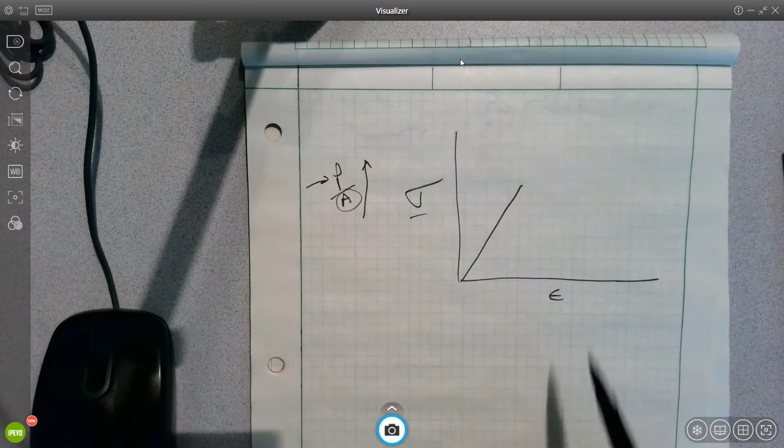And that, of course, raises the stress. Here, as the strain goes up, we know strain is delta over L. The original length does not change, it stays the same—what changes is the delta. So really this is a graph of the load and the change, that's really what the graph is of. We just call it stress strain because those 2 values are what we use to make the comparison when we're designing or analyzing. This first region, where it comes up and then hits the proportional limit...

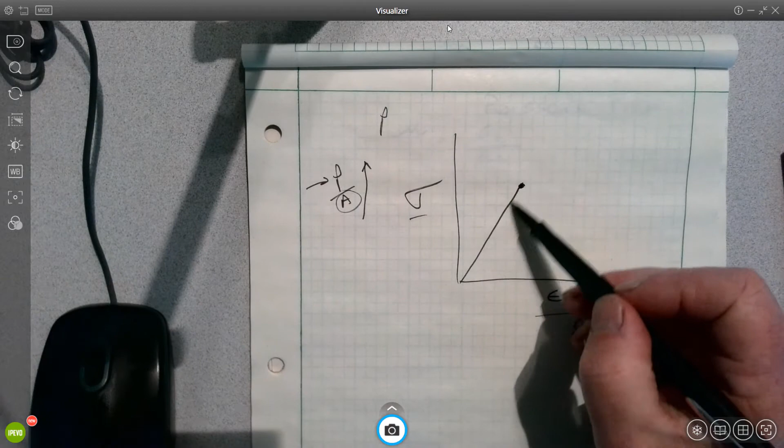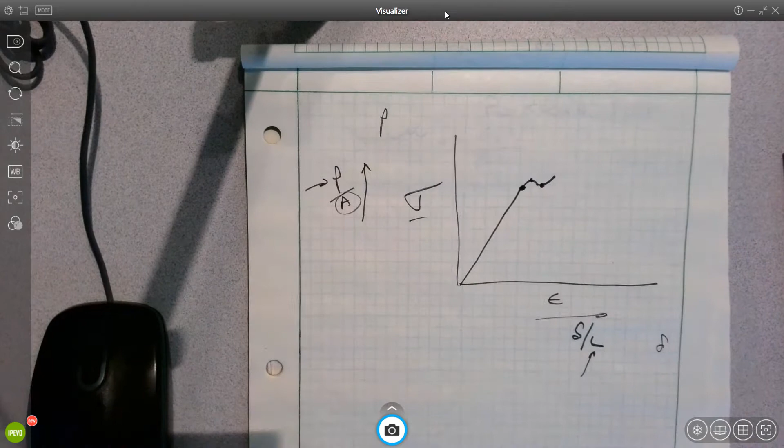Remember, the proportional limit is here at the end of the straight line. So first we hit the proportional limit, then it curls over and we hit the yield point. That's usually called the upper yield. And then we maybe have a lower yield, depending on the material. Not all materials have this beautiful curve like mild steel does. Then it comes over to the strain hardening area, and then it hits the ultimate strength, and then it fails.

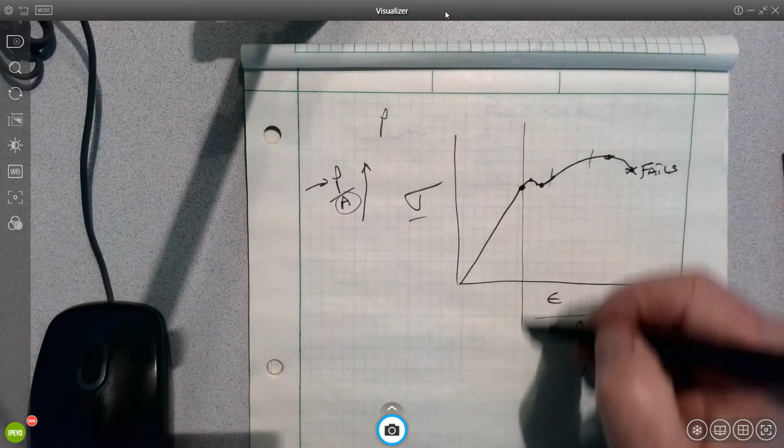Right? So that's our stress strain curve. What I want to emphasize is the Hooke's Law region, is from the proportional limit back, and this is called the elastic region. This is the region that we want to work in, and this is the only region of the graph that E is valid, that mu is valid, Poisson's ratio, which we'll do today, that thermal coefficient of expansion is valid, all only in this region of the curve.

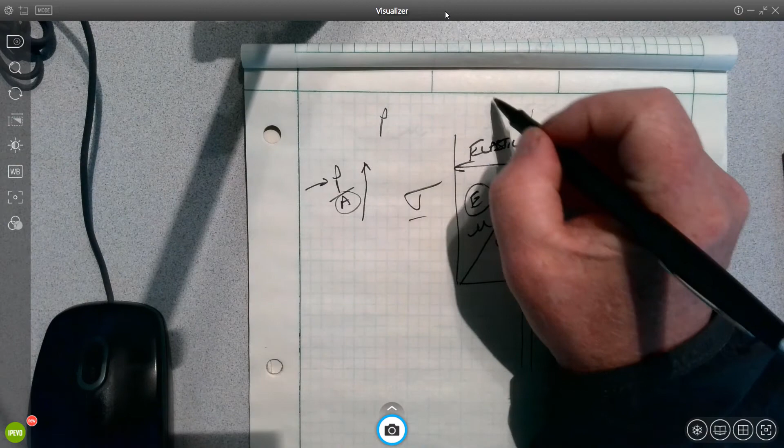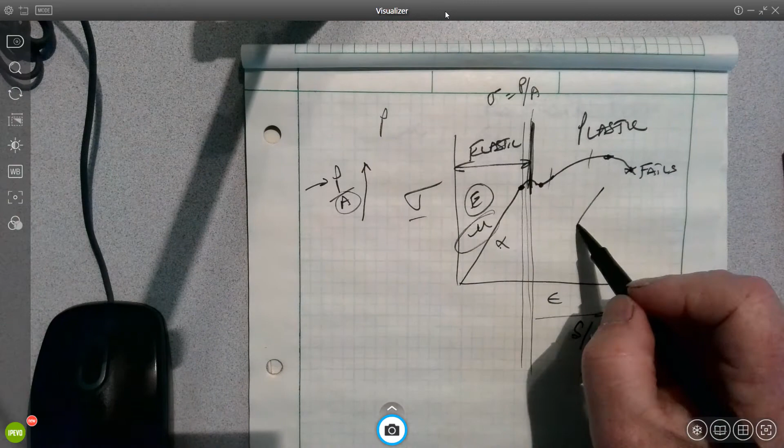If we are outside of this region, and we know this region, because we can calculate stress with P over A. We can calculate that stress, right? And we can see, and look and see, is it in the elastic or is it in the plastic region? That we should be doing first on every problem, because we cannot predict the elongation. We cannot predict the Poisson's ratio transverse change. We cannot predict anything about thermal expansion if we are in the plastic region. This is a no-go area.

All right, there we go. Stress strain curve emphasized.

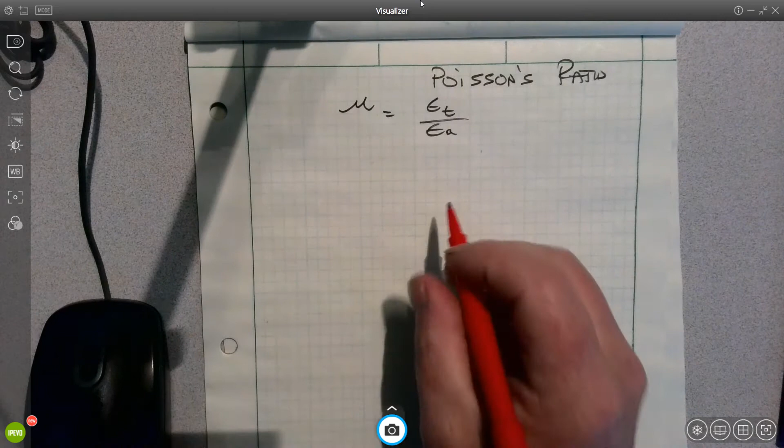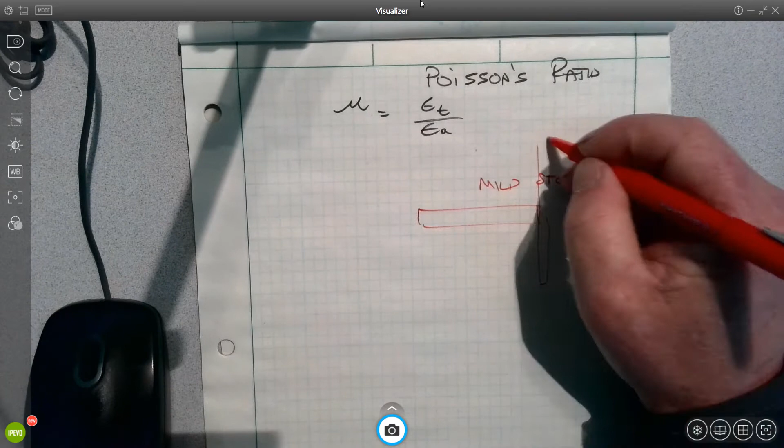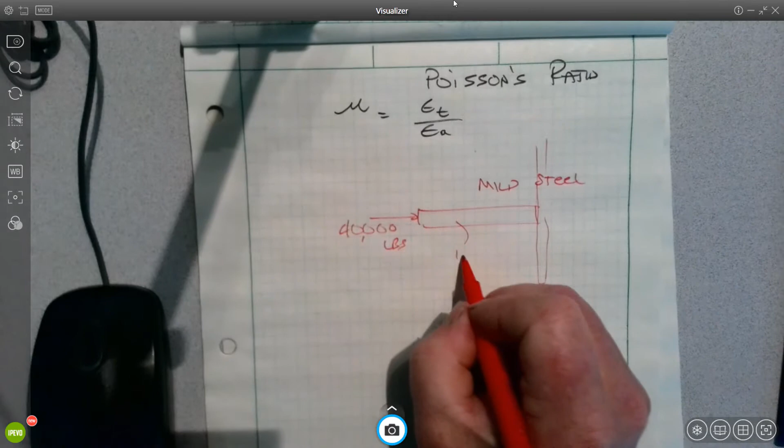If I have, let's say I have a piece of mild steel, and I have it welded to a plate, and I'm going to push on it with 40,000 pounds, a whole bunch of weight, right? And we'll say that this thing is 1 by 1, and it's a square shape, and it's solid, 1 inch by 1 inch, right? So we all know we can calculate the stress, and that's what we should do first, is calculate P over A, just to see if we're still within Hooke's law, right?

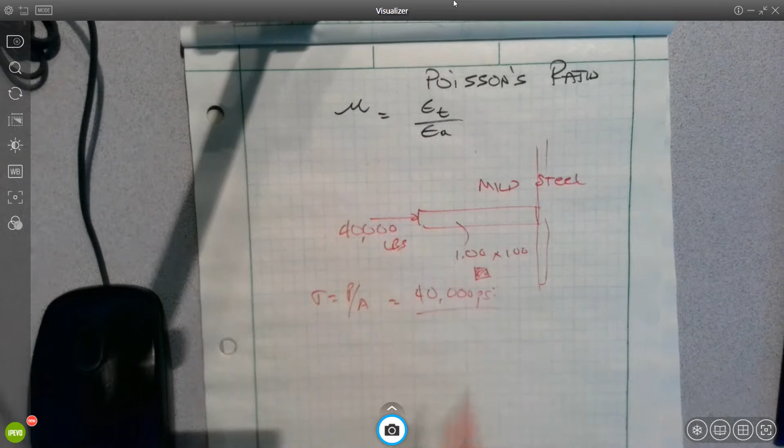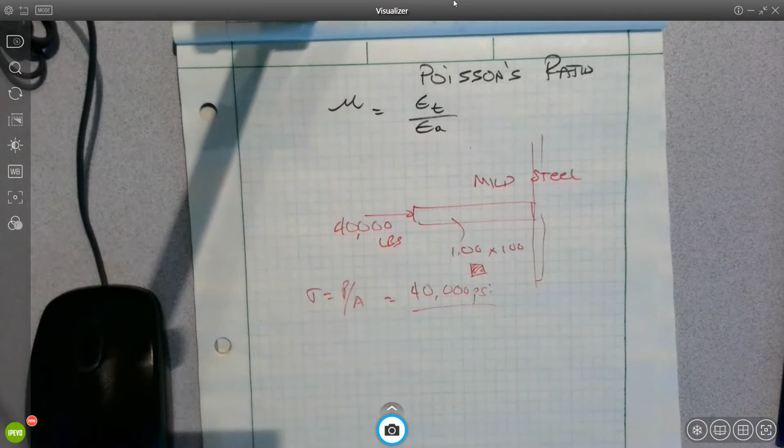So 40,000 pounds divided by 1 by 1 equals 40,000 PSI. Everyone follow me on that? That is 40,000 divided by the area, which is 1 inch squared. 40,000 PSI. I haven't talked a lot about the charts in the back, so I want to do that.

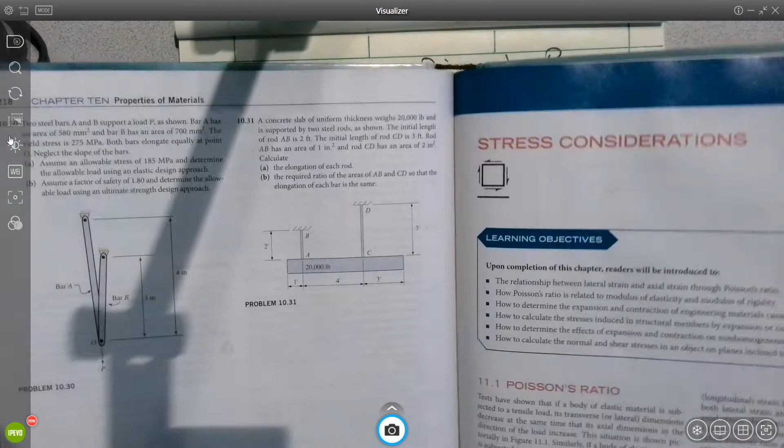This is what, let's say we want to know the elongation. That's our end goal, is like, how much did this deform, right? First thing we want to do is check and see that it's within the Hooke's law region. The region is defined by the yield stress. So let's go look at the yield stress.

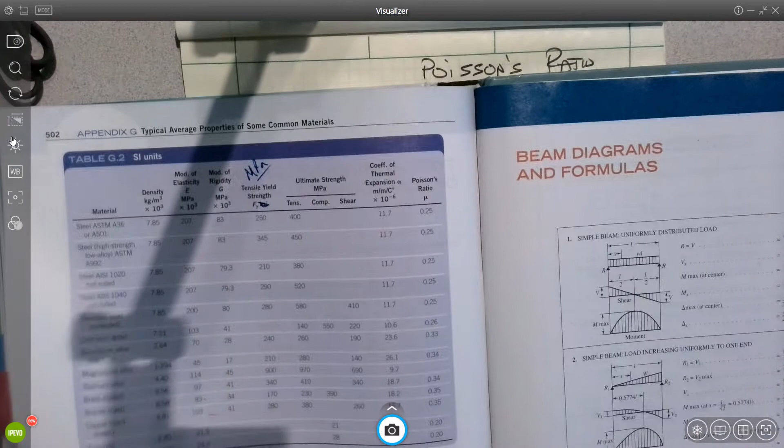In the back of the book are typical average properties of some common materials. Everyone see that? Looks like it's page 501. And in this, we can look up materials, and we can get material properties, E, G, which we have not talked about. Tensile yield strength, we have talked about that.

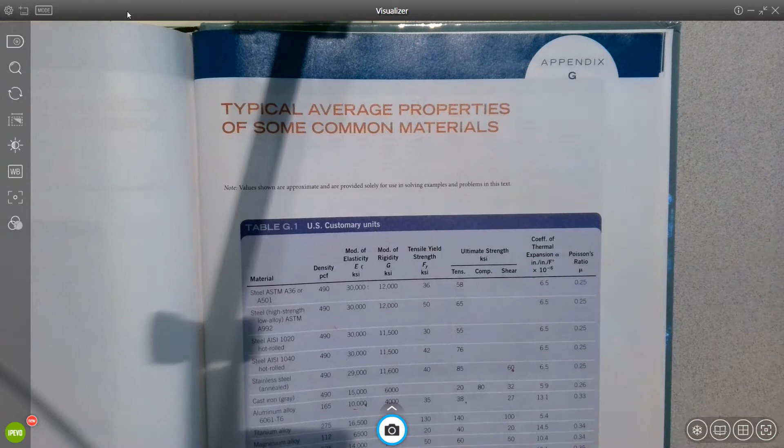That's the upper limit to Hooke's law. Ultimate strength, that's where the curve rolled over, way up past the permanent deformation in the plastic region. And then we have thermal expansion, and look at Poisson's ratio.

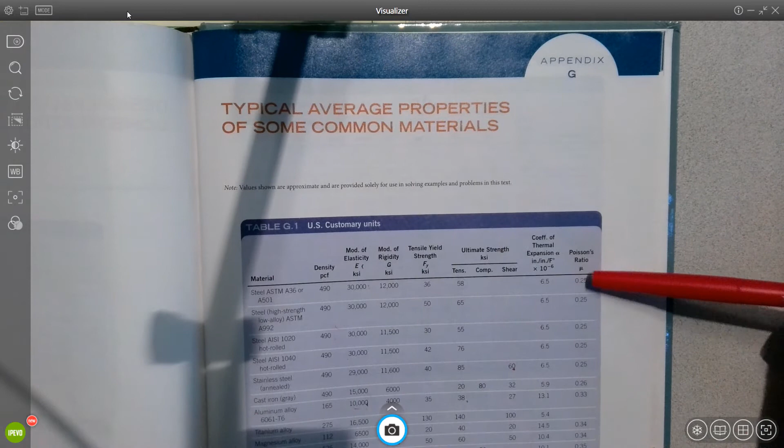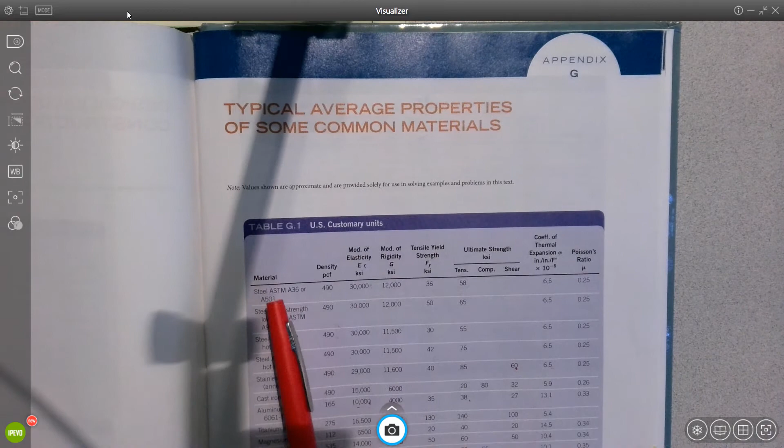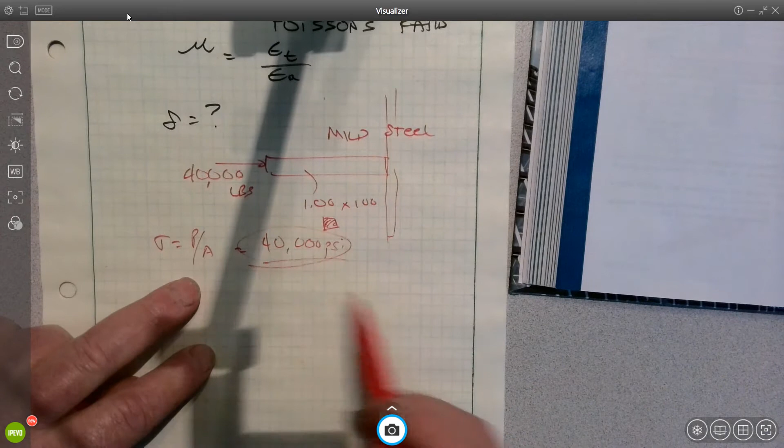Material property. I said we had mild steel, so that's this, A36. And the 36 stands for 36,000 tensile yield strength. 36,000 for A36. Well, let's see what we have. Right? We have 40. So the curve, which goes like this, right here is 36 KSI, 36,000 PSI. And that's where we can do all of our forecasting, under 36 for mild steel.

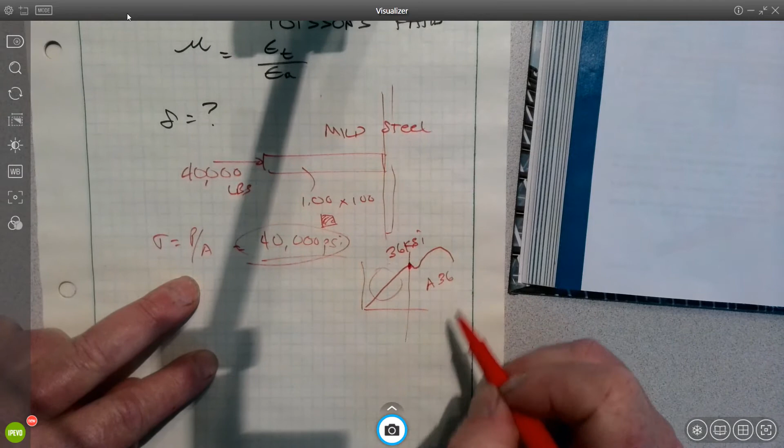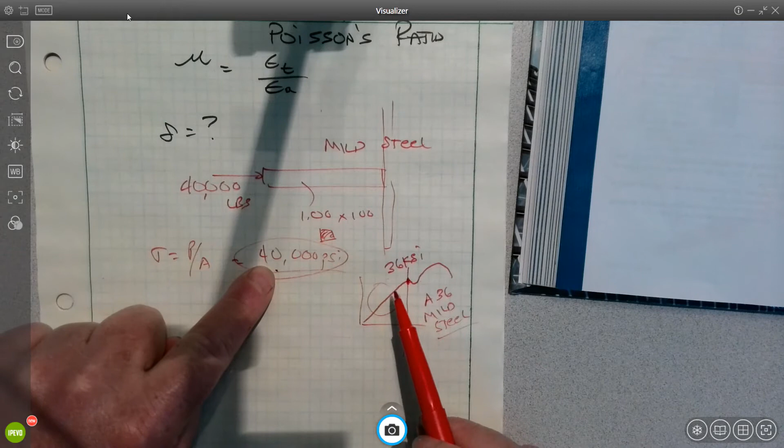This is A36 mild steel. Right? And we have 40. We are in the plastic region. We are outside of Hooke's law. We can do nothing else. That's how it works. That's how and why we check it.

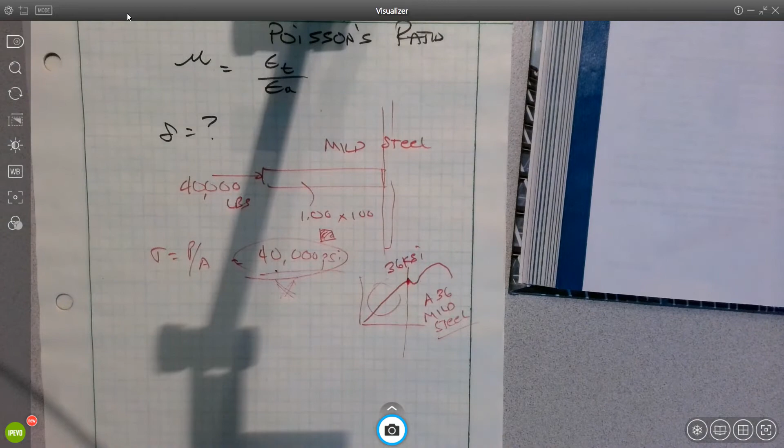Okay? All right. So I want to continue this problem. So I'm going to change the load so we can actually do it. Right? So I'm going to change this to 30,000.

Now I am at 30,000 PSI, and I am down within Hooke's law, meaning that the material is predictable, and I can make some predictions.

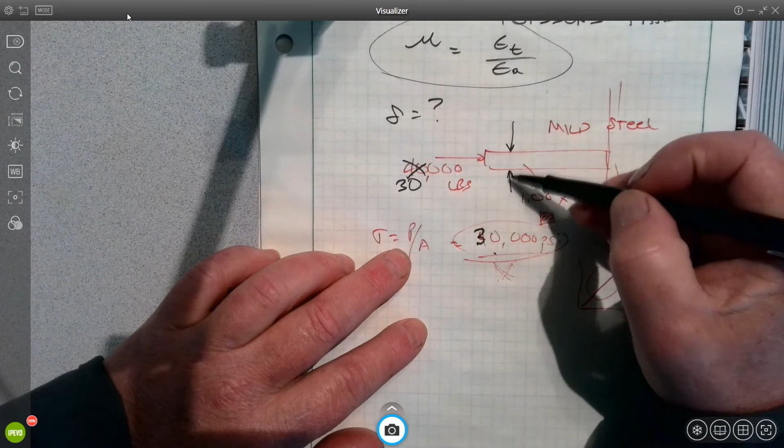So what Poisson's ratio does is it gives us the amount of transverse change. This is transverse, and this is along the long axis of the part. That's what we call elongation, or that's our delta that we calculated before.

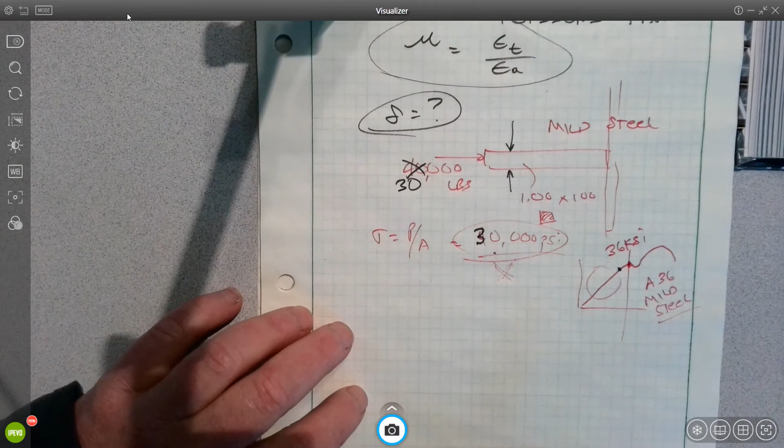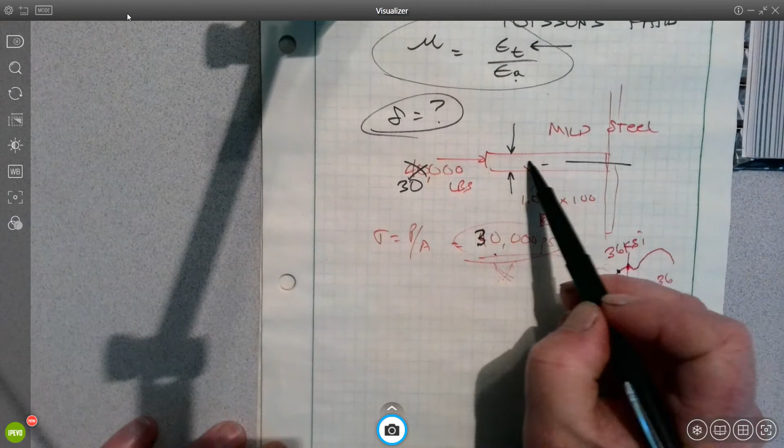So Poisson's ratio relates this transverse change to this axial change along the long axis, which is what we've calculated in the past. And strain, remember, is just permanent or non-permanent deformation, so it allows us to predict what is going on in the change.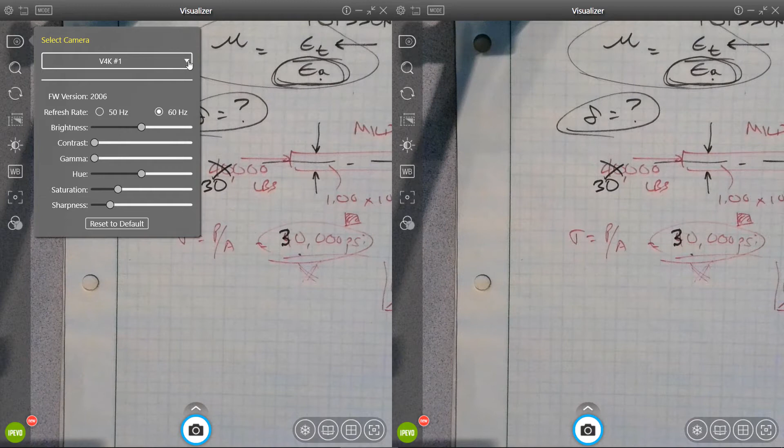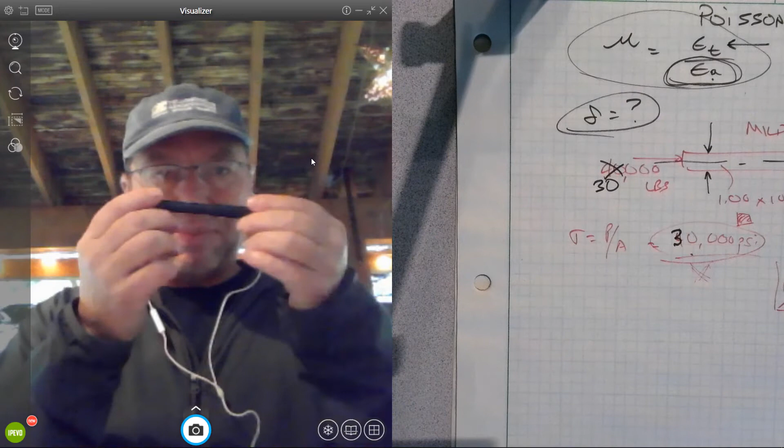Strain axial is what we've calculated - that's how much it stretches. So if I take my pen and I stretch it - oh, that was too much stretch - right there, that's stretch, axial.

When we pull something apart, when we stretch it, that stretch has to come from somewhere, and it is the cross-sectional change - that's transverse. Poisson's ratio gives us that. If we can calculate the axial, and we know the material, then we can determine how much that cross-section changes, and we can calculate a new stress, because if the area gets smaller, the stress goes up. So that's Poisson's ratio, that's why we use it.

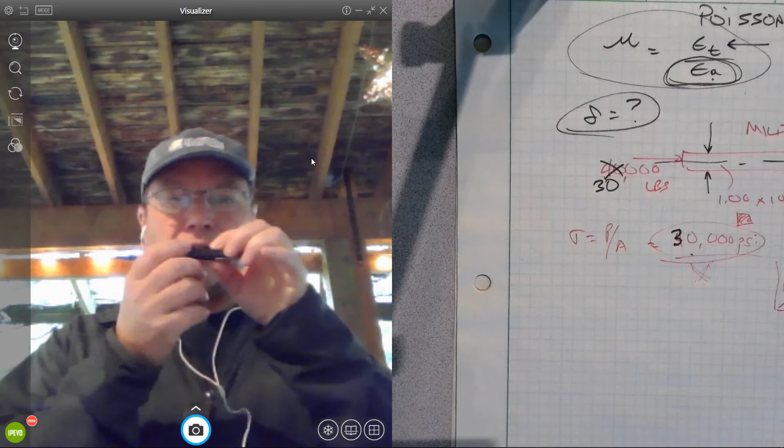It's a very small number typically. Poisson's ratio is very small. First of all, elongation typically is very small, so that means the cross-sectional area changes a little bit. But it's relational as long as we're within Hooke's law.

Let's continue here. Can I just minimize that? Oh, maybe - oh, no, can't do it. I'll get rid of me. I'll be back.

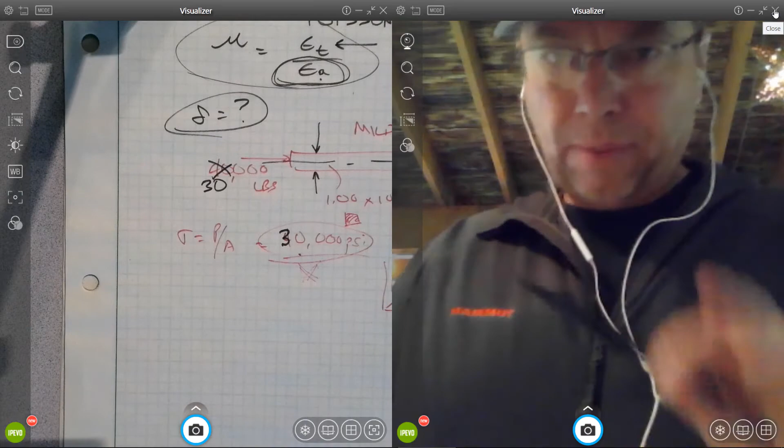So let's calculate this. The first thing, if we want to know how much it changes in the cross-section, the first thing we have to know is how much it changes in the axial, long axis. So how did we get that before?

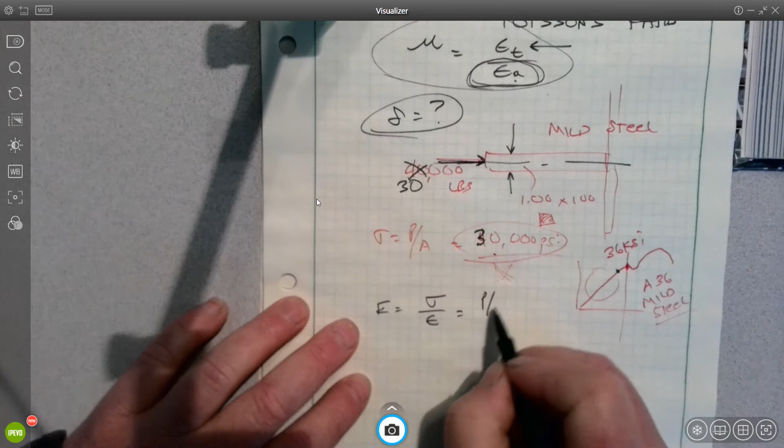Well, we know that E equals - what does E equal? Anyone remember? Stress over strain. And what does stress equal? P over A, delta over L.

This is our axial strain. If I can calculate this, then I can move forward and go for the transverse based on this relationship, because I know this. If I know the material, I know Poisson's ratio.

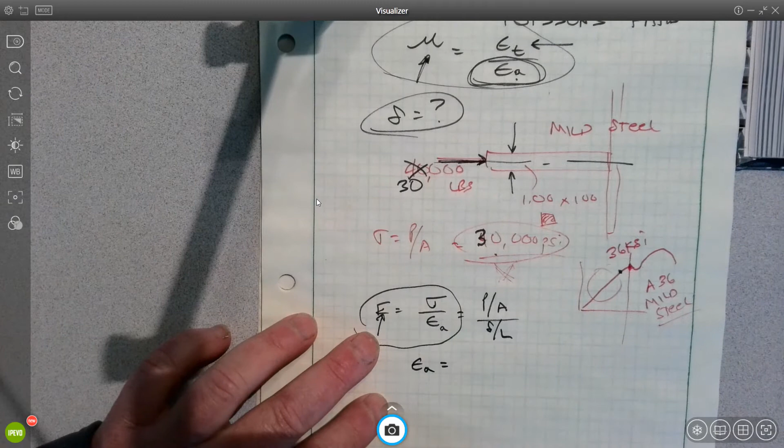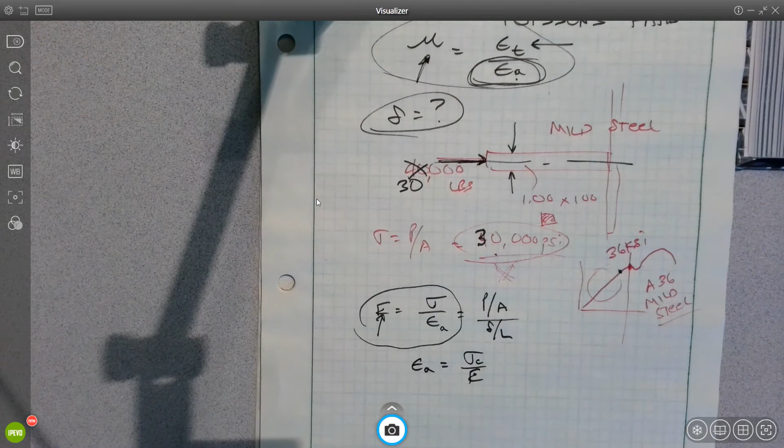So you can use this formula if you know the material and you know the stress. I do. So I can say my axial strain is going to be stress over - and this is compressive stress, right, because I'm pushing on it - over E. So I need E for mild steel. And where do you think I get that? I get it from the back of the book.

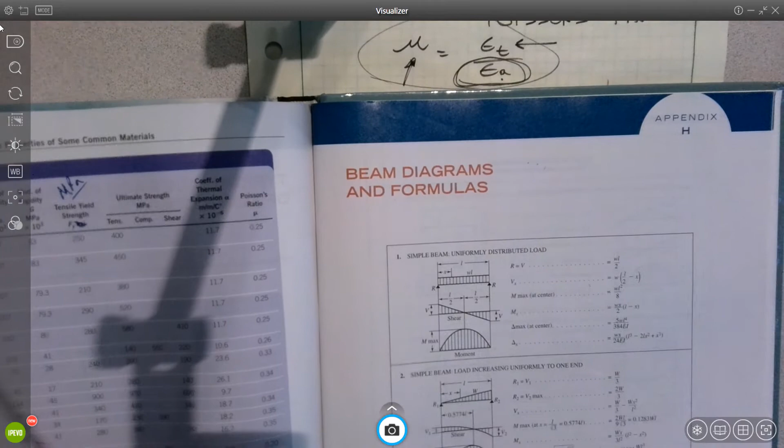You might want to tab this - I got it tabbed here. You know a lot of things about your formulas. And in this case, I know E is, for mild steel, 30,000, and Poisson's ratio is 0.25. So those are both pieces of information I'm going to need.

30,000, 0.25. Notice that it's 30,000 KSI - holy cow, this is huge. This is 30 million PSI, different than yield, which is 36 KSI. You might need to pause this now and then and process this, because I'm throwing a lot of numbers at you that I know really well and that you do not know really well.

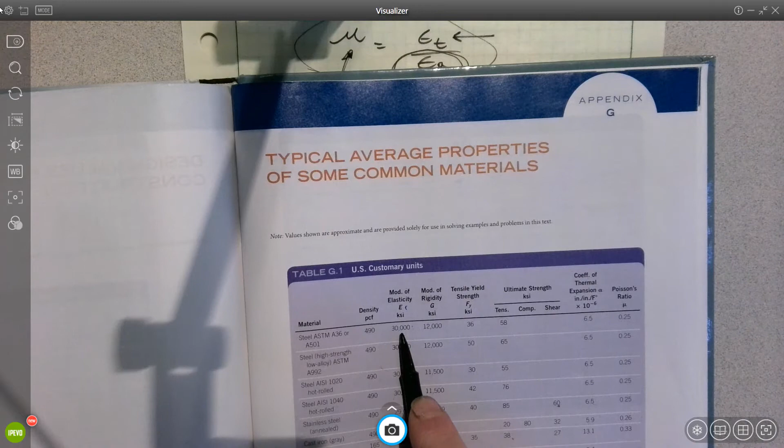So modulus of elasticity is a very big number - Young's modulus, 30 million PSI. Poisson's ratio, 0.25. So let's capture that. I know I have an E of, I'm just going to write it 30 E to the 6 PSI. Remember, it's 30,000 KSI. And then Poisson's ratio is just 0.25, and that's unitless - no unit on Poisson's ratio.

So how do we do this? Here's the E, we plug it in here, and we can say the axial strain is equal to our stress, 30,000. You do want to make sure you're in the same unit, PSI, over E, 30 million PSI. And there's a lot of zeros there, so I'm actually going to calculate it.

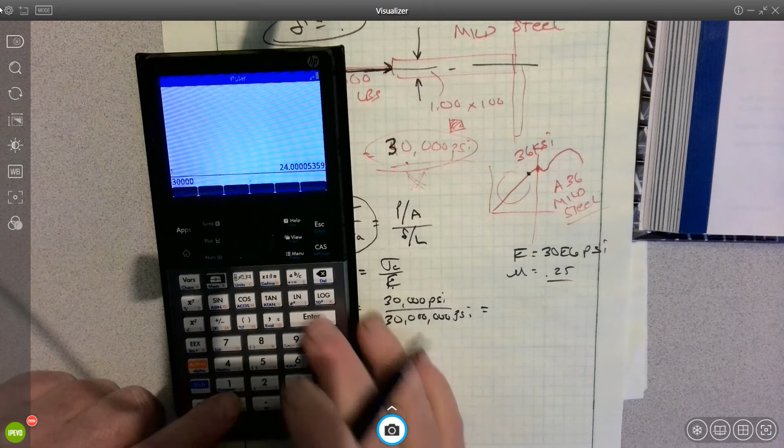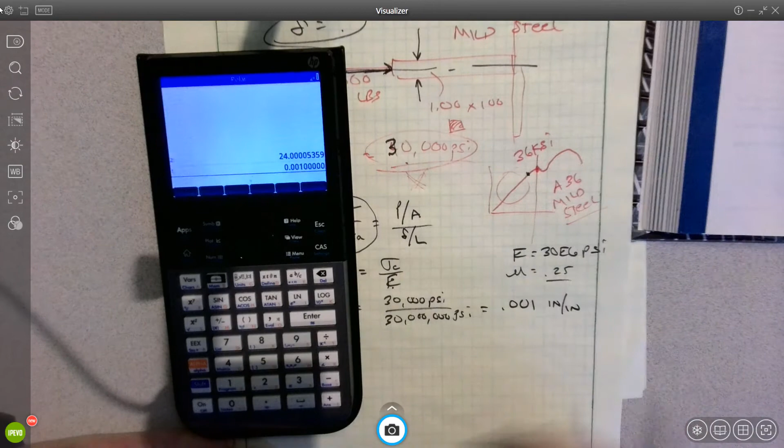I have a feeling it's like 0.001, but yep, 0.001. Remember, the unit of strain is inches per inch - it's how much change we get per inch, inches per inch, that's along the axis. And since we're compressing, this is actually a decrease.

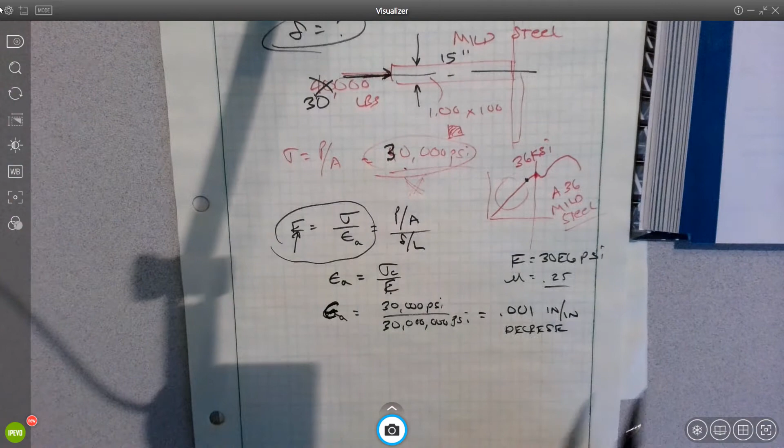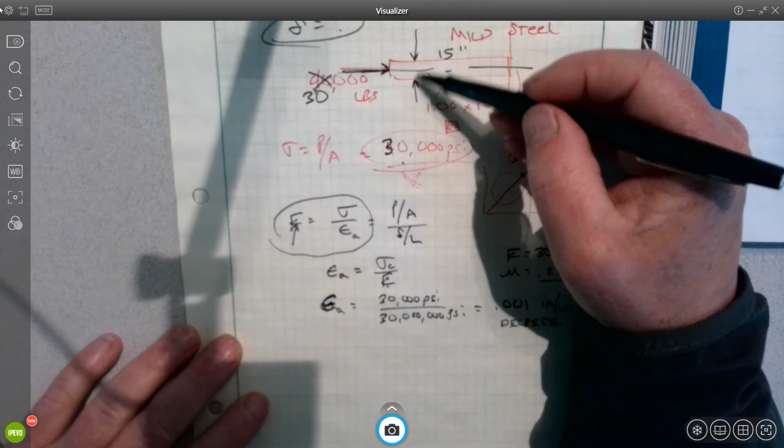Decrease in length per unit inch, 0.001. If I wanted to know the full change, I'd have to have some kind of distance, like 15 inches, and then I could calculate the total change. That's how we did axial strain. Now Poisson's ratio is going to give us how much this increases or decreases cross-sectionally. In this case, when you push on something, it gets bigger, so it increases. The only way you know that is by observation, there's no sign that tells it plus or minus. You just got to know it by looking at the system. So we know that if we push on this, this thing's going to get fatter.

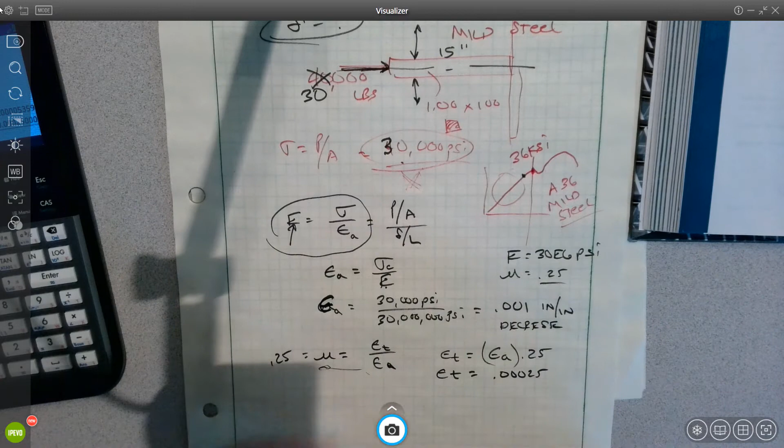Poisson's ratio is the relationship between the transverse and the axial strain. I know Poisson's ratio is equal to 0.25. So if I can calculate axial strain, which I just did, 0.001, I can get transverse. It's a multiplication: the transverse strain is equal to the axial strain times Poisson's ratio, 0.25. Transverse strain equals... so it gets smaller. It's 0.001 times 0.25, equals 0.00025. It's always very small. That's how much the change is. Now that doesn't give us a dimensional change, right? That just gives us the transverse.

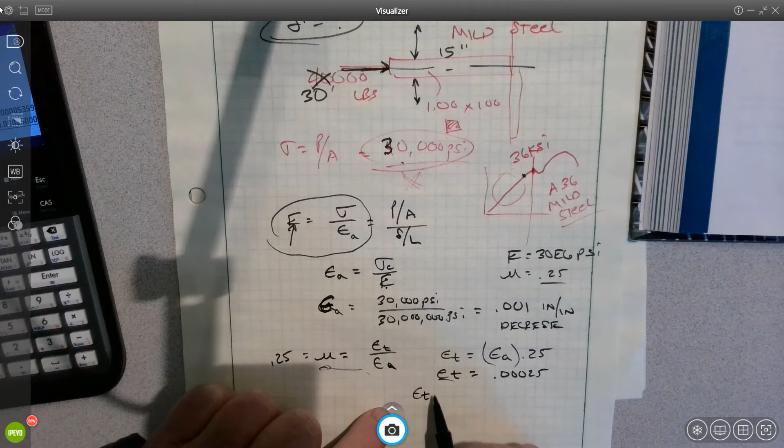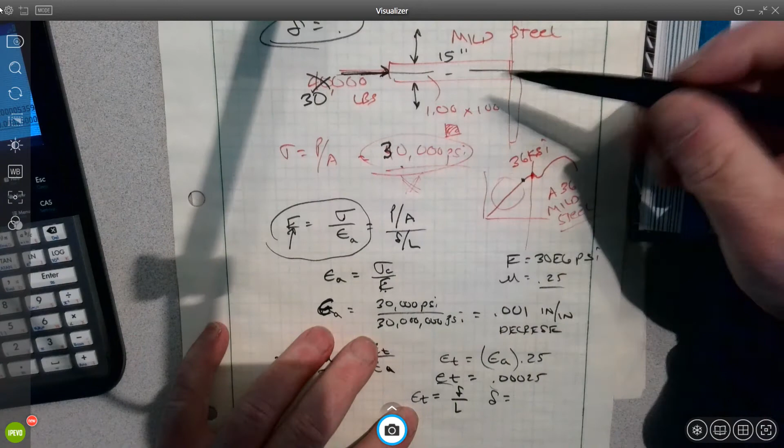But we know the transverse is equal to what? What was it equal to? Delta over the original length. And if I want to know the actual dimensional change, I put in the original length, I calculate a transverse, and I can get the actual delta change, which is going to be L. I said this was 1 inch by 1 inch, so original length is 1 inch, and my transverse that I just calculated with Poisson's ratio is 0.00025. So the actual change is 0.00025 inches increase, because I'm squishing it. And it goes, right? Increase.

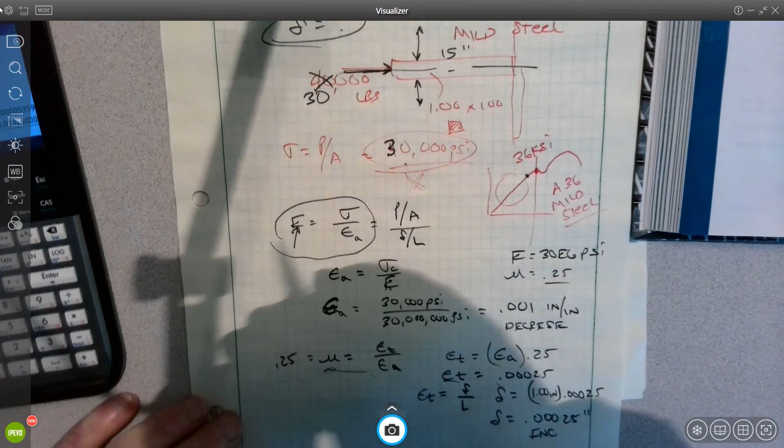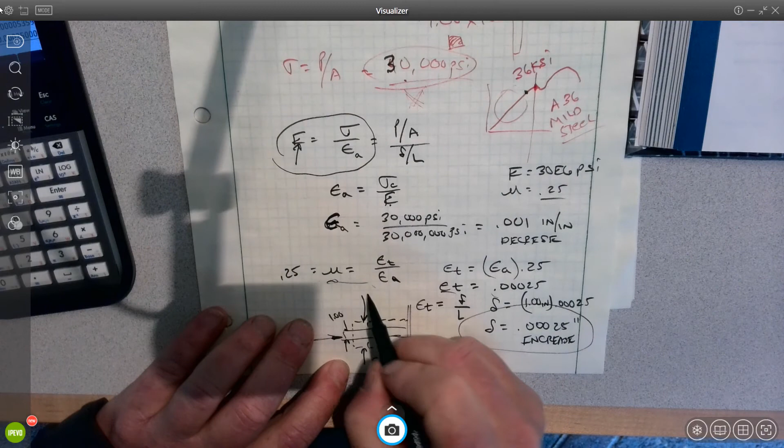And that's the delta, like, it was like this, right, when we're pushing on it, and now it's like this. This is an exaggeration. We push on it, it gets fatter. So this becomes my transverse strain, which gives me my delta in the transverse. So this is the total increase. It really is half on each side, but it goes from 1 inch to 1.00025. You're thinking, that's not very much. That's true, not very much, absolutely not very much. But it's important, especially when we stretch things and that area gets smaller. If you're designing near the yield, it can push it over the yield.